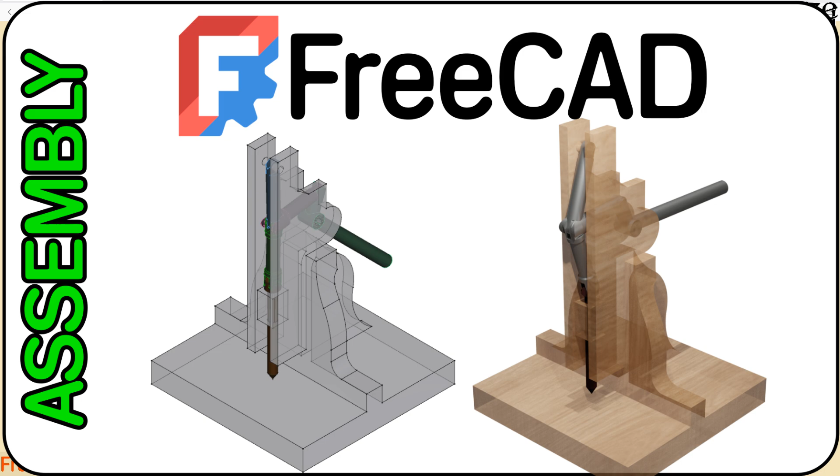Today I'll be working on this mechanical movement number 140, which is a kind of bias press. I think that's what it says. The toggle joint arranged for a punching machine. And this website also has this animation here. So this is how it works. There is a lever, you push it downward, it will push down this end.

And I think this would be a great tool to build on FreeCAD. So today I will be building this model in FreeCAD release candidate 2 of version 1. Let's go ahead and start working on it. First thing first, I want to import this image into here. And I think it's the downloads and right there.

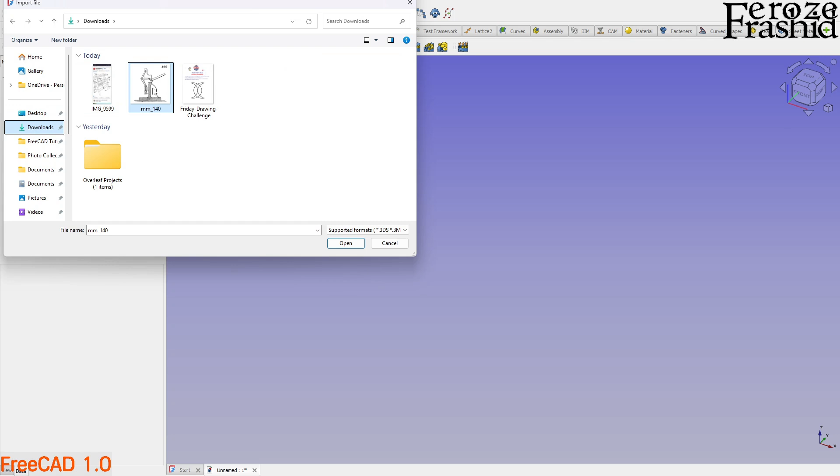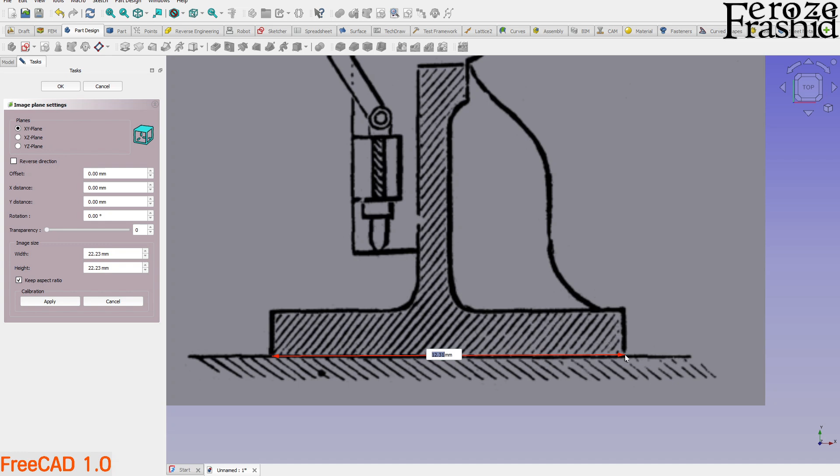All right. And I want to calibrate this image, so there is no measurement in here, so we'll just go by our eyeballing guessing. And let's say the base is about 6 inches wide, so that is, I'm gonna say 150 millimeter. All right, and that will give us some idea what other dimensions will be.

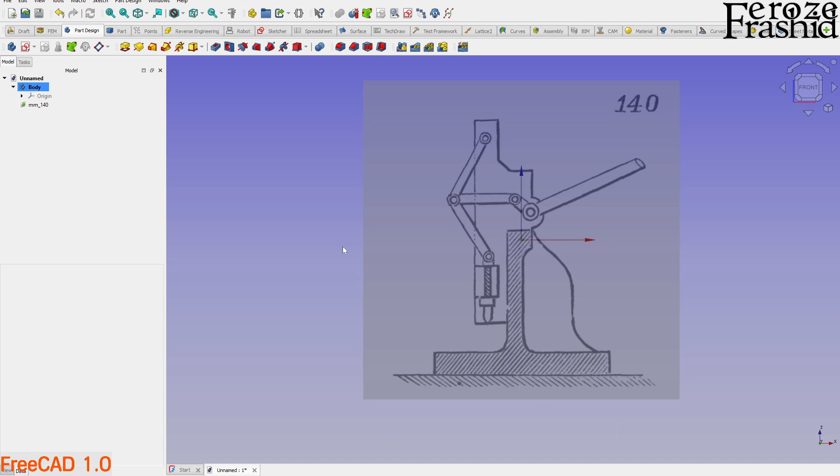Let's make it half transparent, and I want to place it on the front, which is the XZ plane right there. And then let's bring in axis cross by pressing AC on the keyboard, and I want to relocate the image to a suitable location. I'm gonna go ahead and say halfway. Not that it matters too much, but I think halfway is good right there. So that's all about image processing.

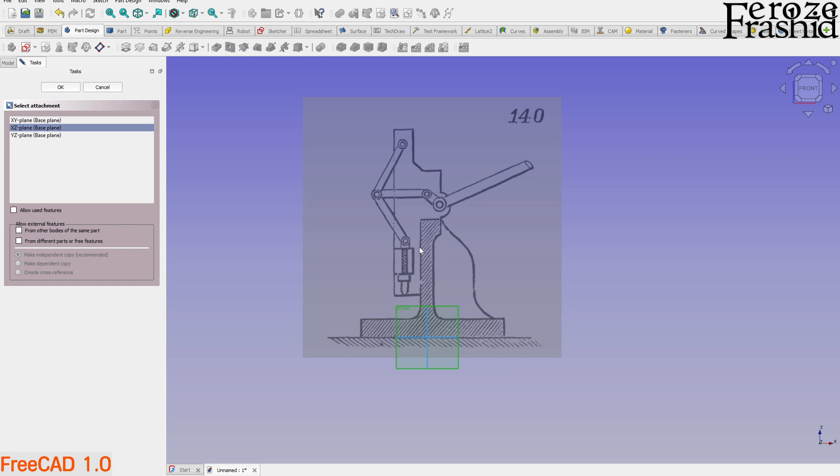And now I want to build one master sketch on this whole thing, and then we'll be reusing that sketch multiple times throughout this process. And exactly that's why we are building this model in Part Design. So with that, our first job is to build a sketch on XZ plane, and I'll use the polyline tool and do the outline real quick. All right, so I took a minute and drew this outline.

And if you are first time knowing about this new Part Design feature, up until the previous version, we could have only one area. For example, if we wanted to draw something in sketch, it would have to be a closed wire. It could not be like that. So it could only be one area. For example, here there are two separable areas.

So up until the previous version, FreeCAD could only handle one area, but in Part Design, the new version, it can have multiple areas in there, and then we can reuse that sketch multiple times. And that's why I built this whole thing, and it will be this master sketch. And here you will see that I have these multiple areas divided in there. For example, this line is broken into two because I want to use these two lines separately at separate steps.

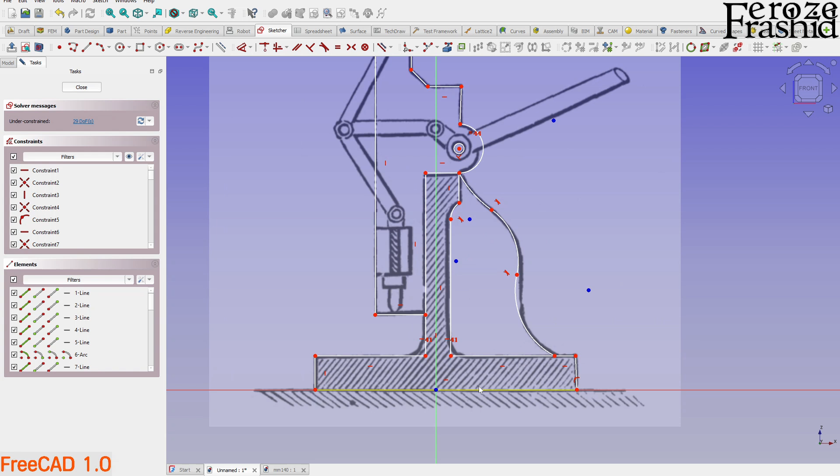And I did all the ballparking, so let me take another minute to actually go through and add some dimensions in here.

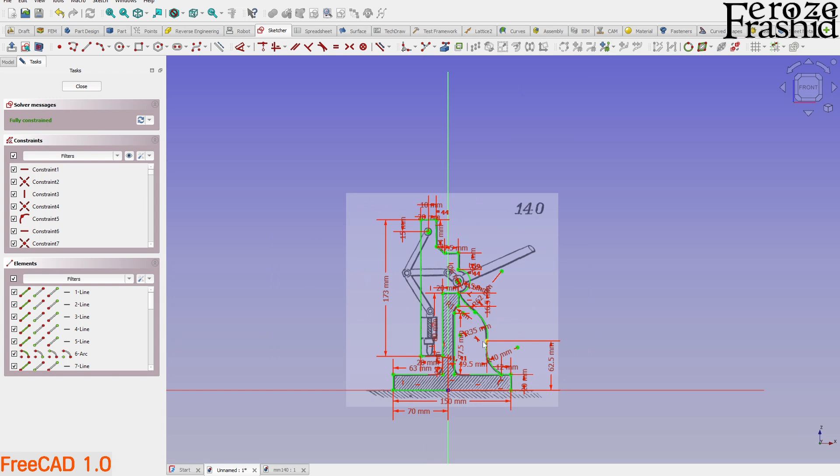All right, my friends, I have this sketch fully constrained, and I'll also upload this model. So if you wanted to download it and play around with this sketch, you can have that. So don't worry too much about these dimensions, but also know that these are ballpark dimensions.

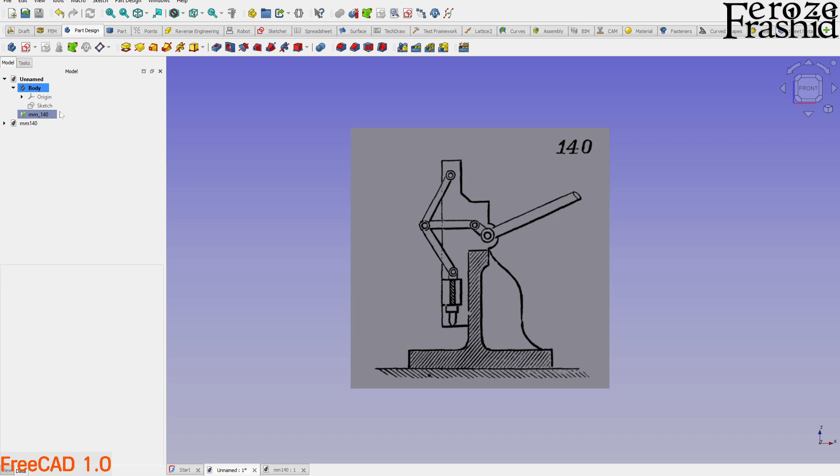So if we close that sketch, this is how it looks. As I said, it has multiple areas for us to extrude in Part Design. So let's take a look at this image one more time and see what we want to extrude first. This one looks like it's cut into cross section, and these two parts are solid ones. So what I'm guessing, this will be the base. So let's go ahead and take care of that first.

Now here is one thing that bothers me a little. If you want to use this inner side for padding, you would have to go around and select each small line. I wish there was an easier way. This is a big improvement, but if anybody is listening, maybe we can double click on this space, and that would just take all the lines bounding that space and select all the bounding edges. That would be nice, wouldn't it?

So until that comes, let's go ahead and select all the lines by keeping the control key on the keyboard pressed and using the left mouse key. And now that we have all the outer lines, I can go ahead and pad it up, right?

And I can pad it, say I want to say this is 150 millimeter, right? And I want to make it symmetric to the plane. So this is how it looks like. Later on, I actually want to trim this part just a little bit, so we will worry about that later. And also we'll have to make a fillet at this corner and this corner, so we will do that later.

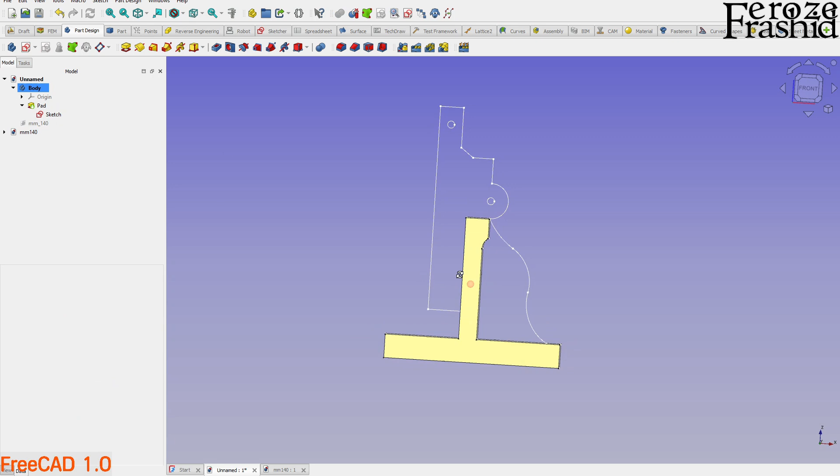But for now, let's go back to the sketch, make that visible. And so we have that base part. Now we'll have to work on this. So let's hide this pad for a minute and start selecting edges. So you will notice, because I'll be using this part individually, I broke this line in two right at this point. Otherwise this line would not be selectable up until that point. So you'll have to keep that in mind when you are sketching.

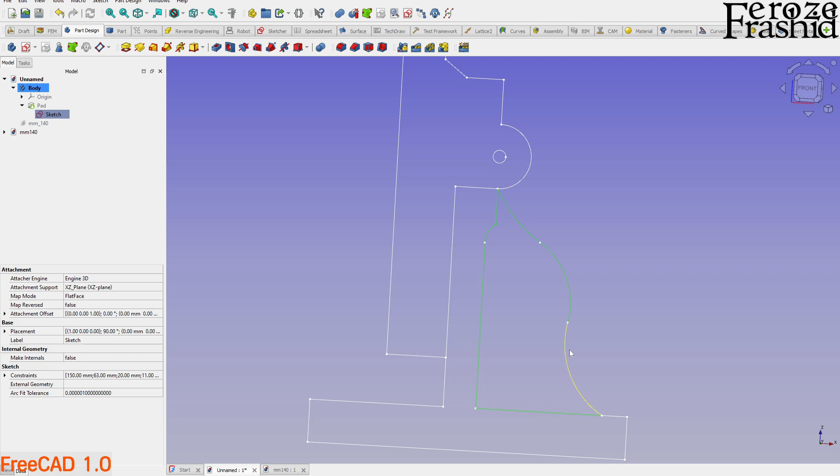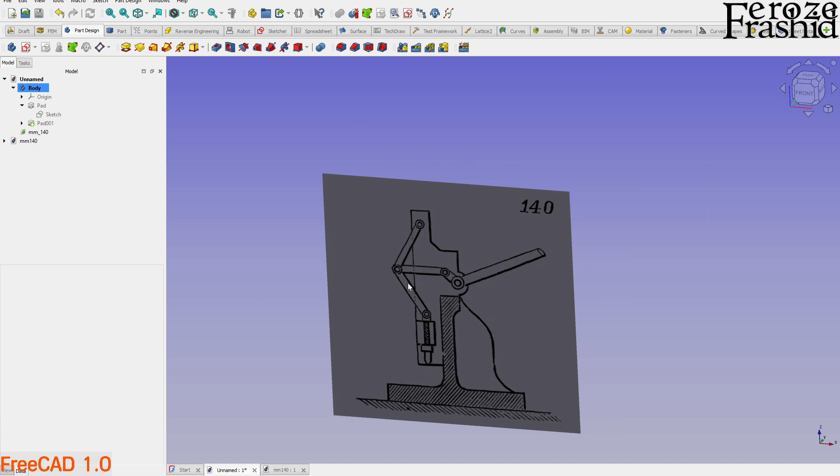All right, let's pad that up for now, say about 10 millimeters, sounds good. And make that reverse symmetric, that way it's at the center. So far we have this part and this part. Now on this one, we'll worry about these bars later, but this supporting side, I'm thinking that will be two sides, like there will be a gap in the middle for these to play around.

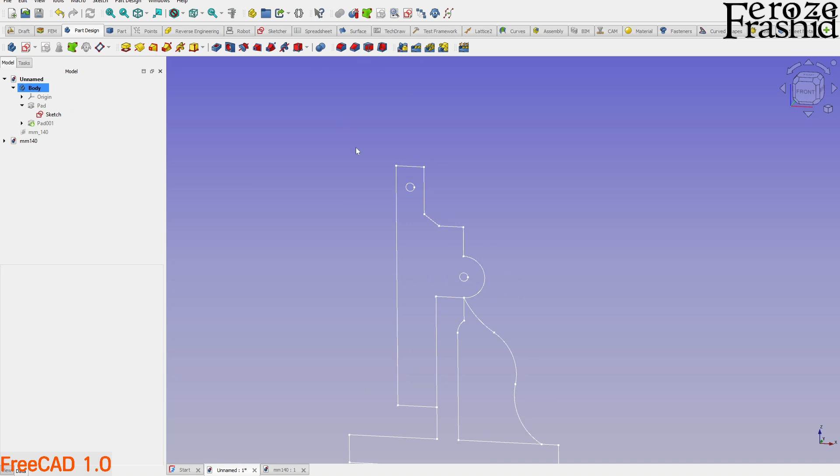With that, what I want to do, bring the sketch back and select the edges. I don't want to select these holes right now. So I want to go ahead and select this outside area. Yes, and then I want to pad it, right? So if I pad it one way, that comes this way, I want to make a gap in there. So I tried out this trick. Let's see how you like that. Select two dimensions in here. So if you select two dimensions, this 10 millimeter brings in towards me. This second length 10 millimeter brings away from me.

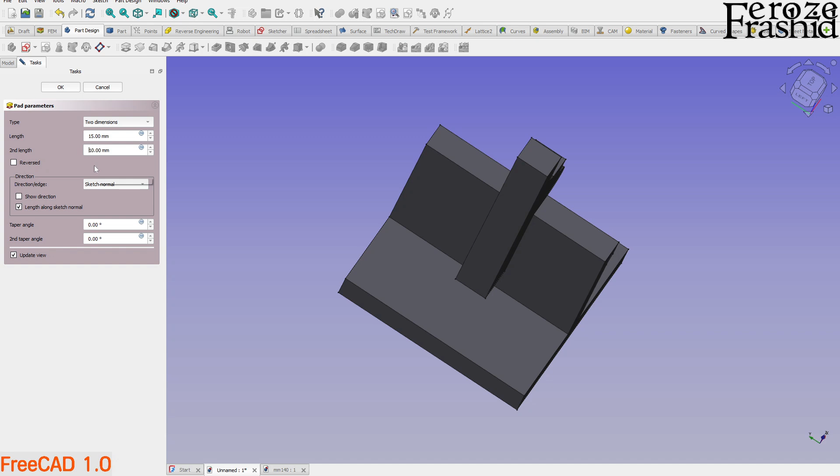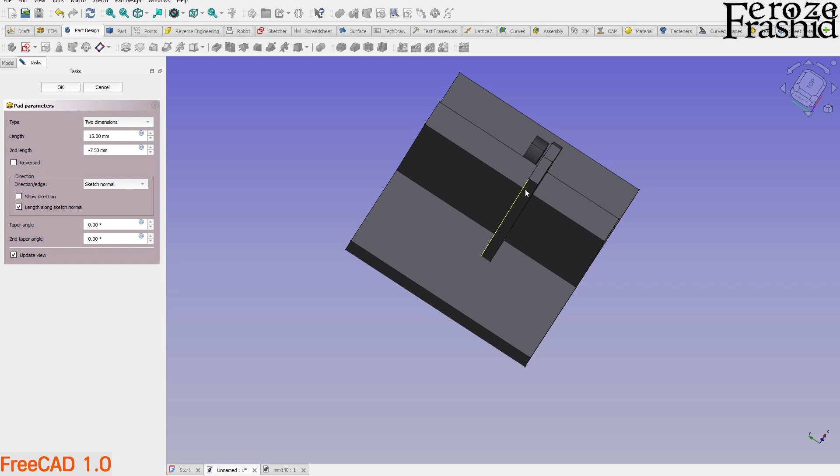So what if I made, say, this one 15, so that pushes toward me 5 more millimeter, and then I just made this one minus 10. How does that sound? Sounds great. So that's one way to actually offset it from here. I know there are other ways, but this could be done too. So I'm gonna make this one minus 7.5 millimeter. So the middle gap is 15 millimeter when I just double it up, right? I think that makes it easy.

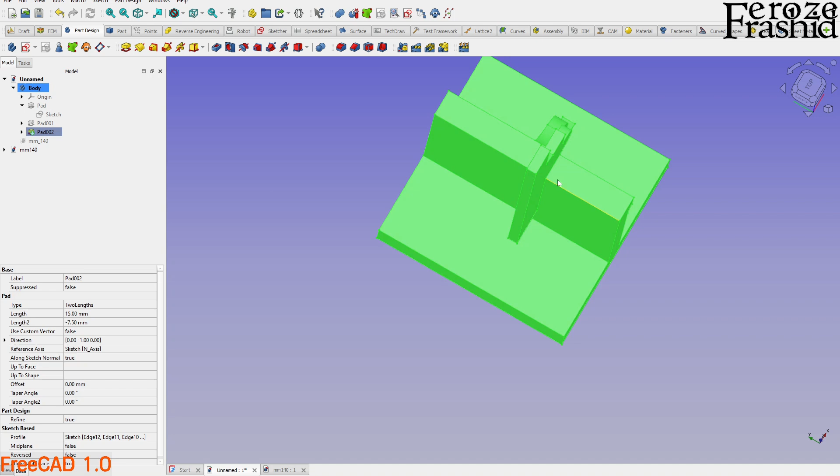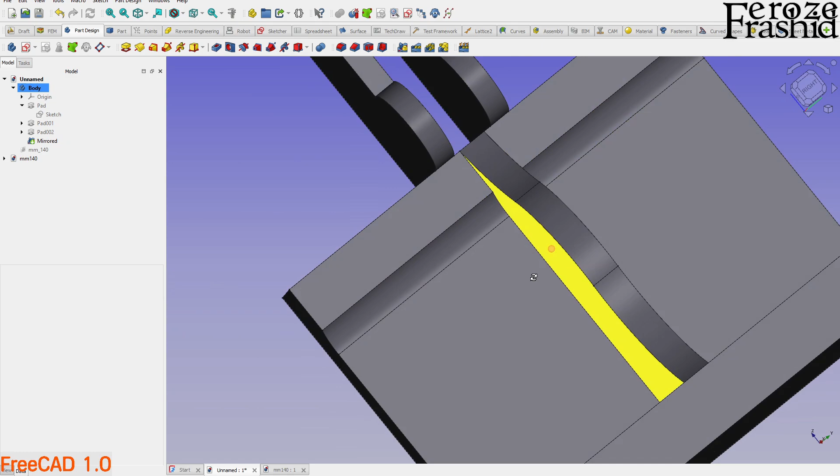Pretty cool. Now what I want to do, I want to take only this pad. Although when I select this pad, this whole thing selects. If you are proficient on the Part Design workbench, you know that when we are doing mirroring, this pad will only affect this little part. So I select that and mirror it over on this side, and that is going to be the XZ plane there, just like that. All right, so we just got our room for those bars to play around. All right, we built the main frame.

Now what I want to do, I want to make a pocket here, and I can go ahead and make a pocket, say through all. Pretty good. Now I can go ahead and take the pocket and mirror it again on the other side. So XZ plane, and then make sure transform tool shapes is selected. If it is transform body, for some reason it doesn't do it. So transform tool shapes, that's the new thing on this new version. Now it looks like the picture. So there is this spine, there is this main body, and here are the holding pieces. All right, we are going somewhere.

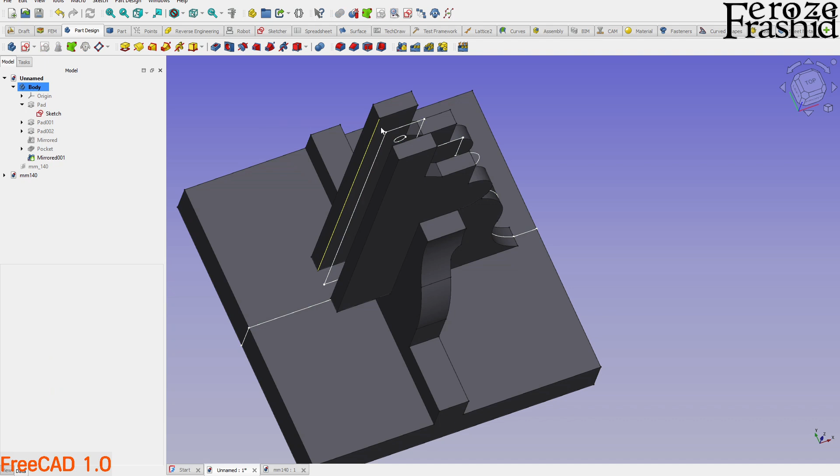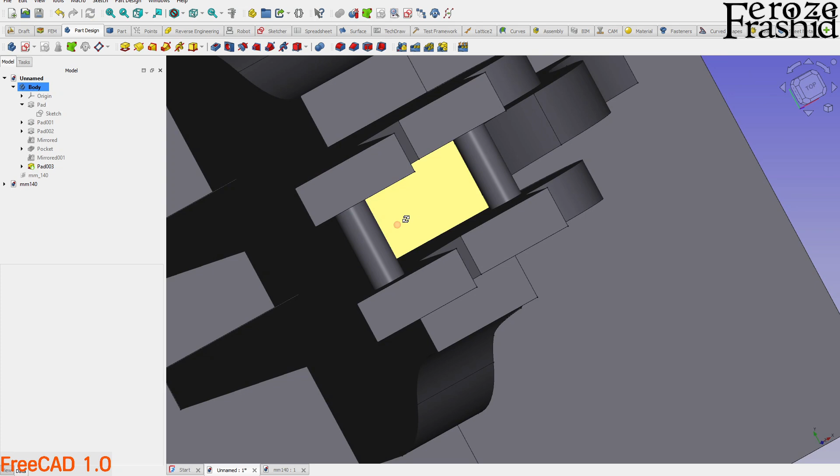Now quickly, I'm going to go ahead and bring the sketch back and use these two holes right there. So these two holes, and then extrude that, make a pad out of it. 10 millimeter will not do it, maybe 20, and make it symmetric to the plane. Make sure this touches both surfaces, and so that is pretty good. All right.

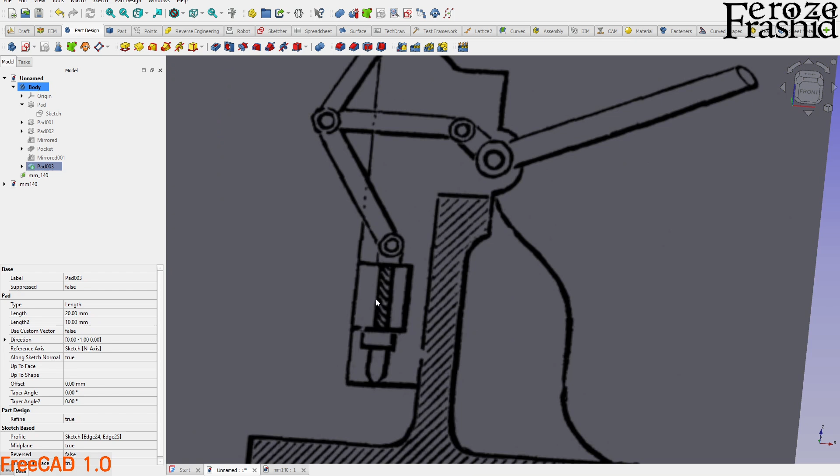Now let's take a look at this image one more time, like this. Now we'll have to work on this. Maybe we'll do this one too. So there is this area where the plunger will go back and forth, and that's integrated to the base, so we'll have to work on that one too. And that one we will just work off of our guess. So what I'm going to do is take this point, this measurement. So select this point. This is at 43 millimeter in the Z direction.

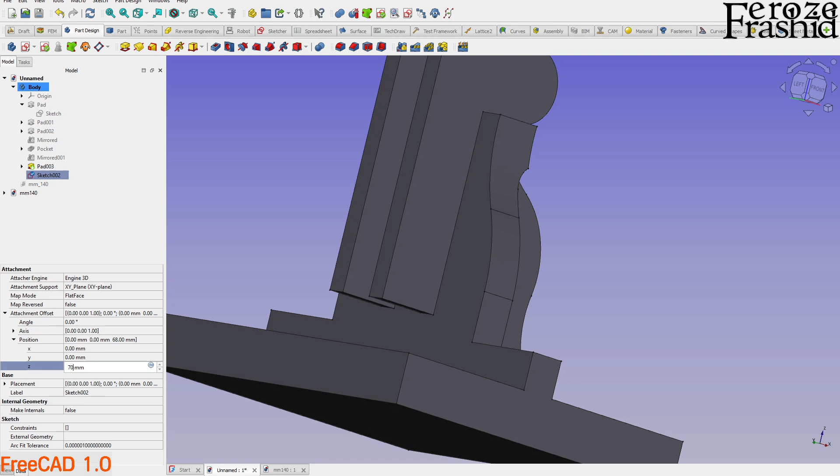So what I want to do, I want to draw a sketch on the XY plane for now, right? And then close it up, and then on that, let's go to the position on Z. I want to say 43 plus, let's pull that up by 25 more millimeters. All right, 68, maybe make that 70, right? And then what it does is it brings the sketch up right around here, and that's what we wanted to do.

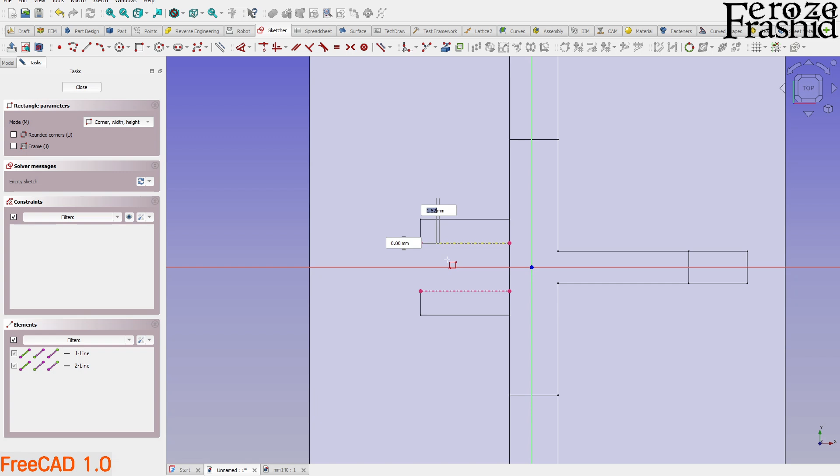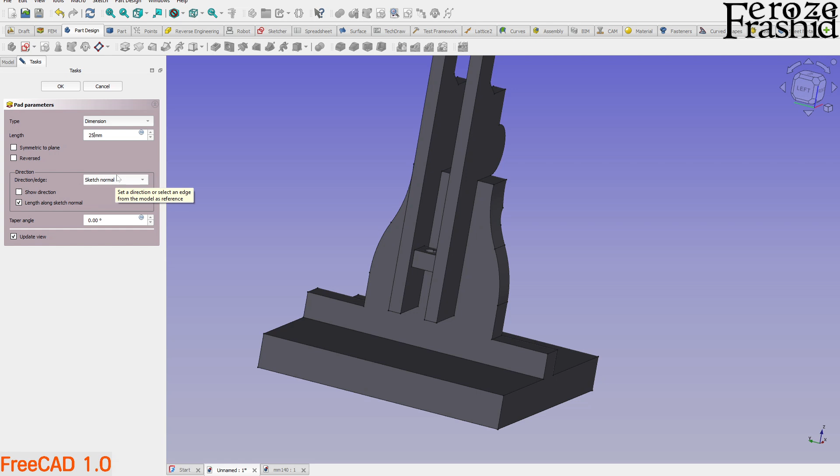Yes. And now on there, turn on the section cross, and then I took these two, and now there will be a rectangle outside and a center circle inside. So we have that sketch. Now maybe rename that sketch, say sketch plunger holder, and then pad it up for 25 millimeter. Sounds good. And there.

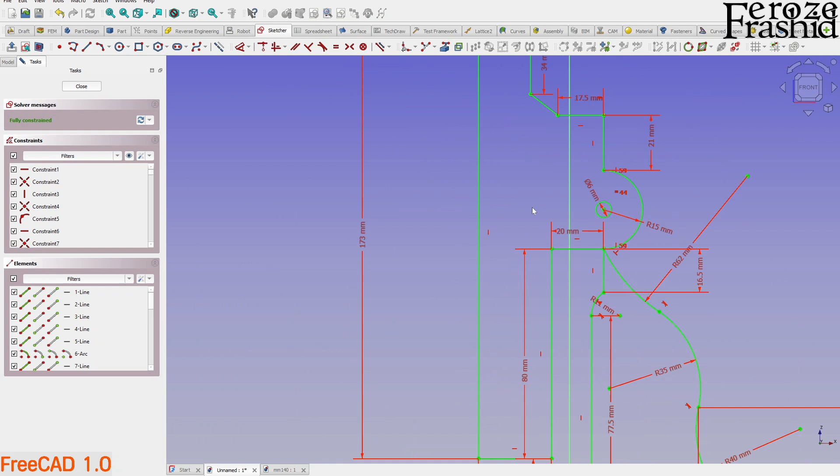Now on this one though, I think we'll have to go back. See how these two are not aligning? I would like them to be aligned. So let's go back to this and see this point is 10 millimeter from this side, which I want to use in here.

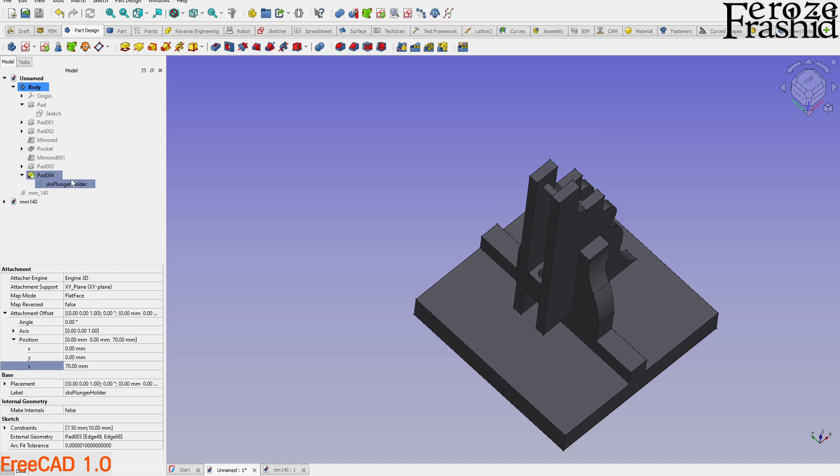So delete that, right? And then take these 2 points and say this should be 10 millimeter. So that way this will be another holder, and these two are concentric at the same center, not eccentric, and that's what we need. All right, so this is our first object, and say this is the base. Works pretty good. And now I'm going to rename that, say base body.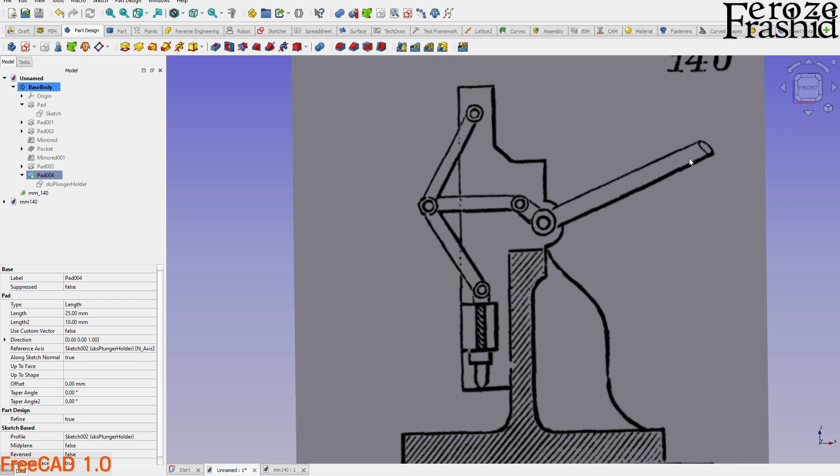All right, let's take another look at this drawing. And now we'll have to work on this plunger, this handle, and then 1, 2, 3 more bars, and this connection would be crazy. All right, so we'll have to make 1, 2, 3, 4, 5 small pieces connected in there. So let me take a minute and make these smaller pieces.

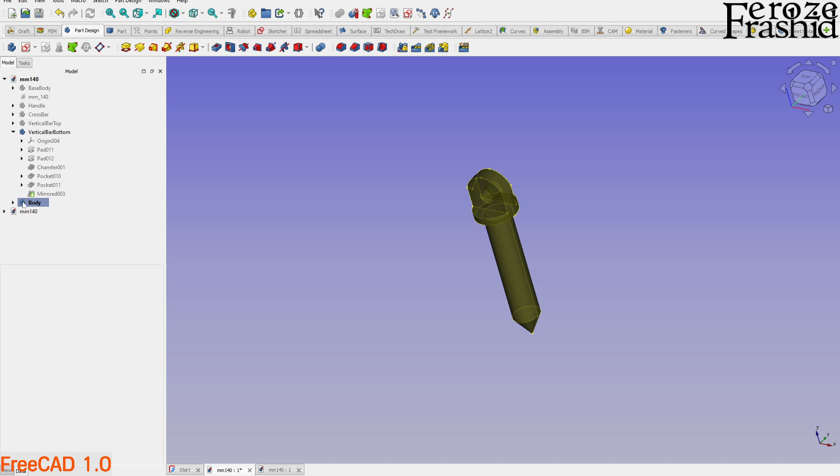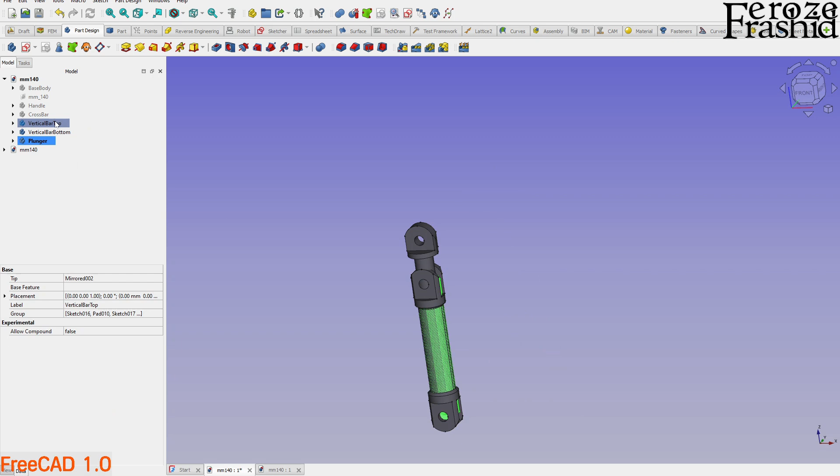All right, my friends, so I built all the parts. Let's take a look. This one is the plunger, right? And then we have this vertical bar, right? Where is that? There it is. And then we have another bar, all stuck there. There is the crossbar, there is the handle, and here is the base body.

Now note that these bars, the length may need to be updated, so we will work on that when we actually work in the assembly workbench. All right, so all the parts are modeled. Now it's time to put them together. We will be working on this new assembly workbench, which is new to FreeCAD 1 version. So if you are working on FreeCAD 0.21 version, I'd recommend go ahead and install FreeCAD 1 version from the website and give it a try.

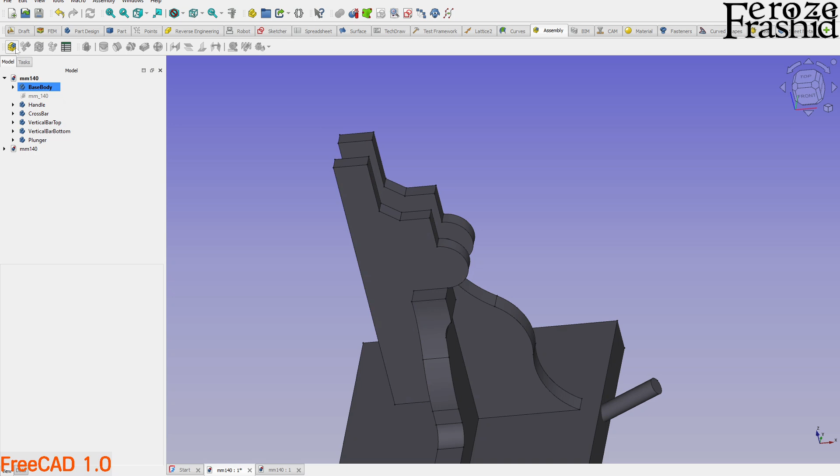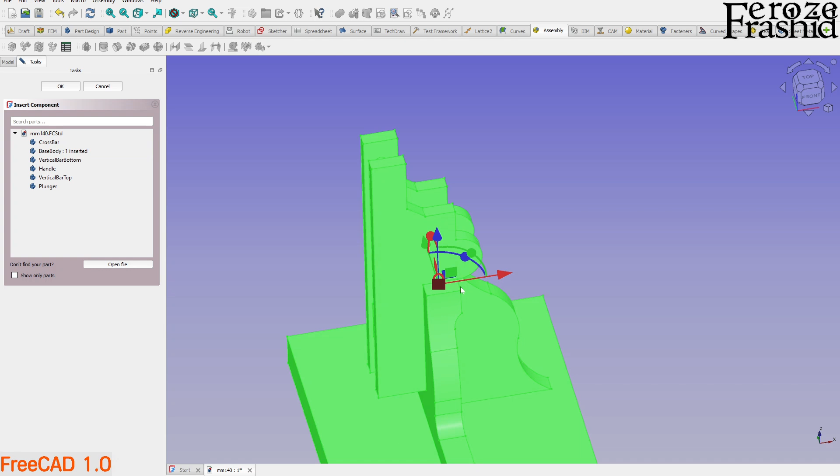So first of all, we want to add an assembly, and then I want to go ahead and hide all of these parts, so that way it's not getting confused. And then I want to add my first thing. So base body was my first thing. The first part will be grounded, say fixed in there. If you don't have it, go ahead and click yes. There will be a notification in here.

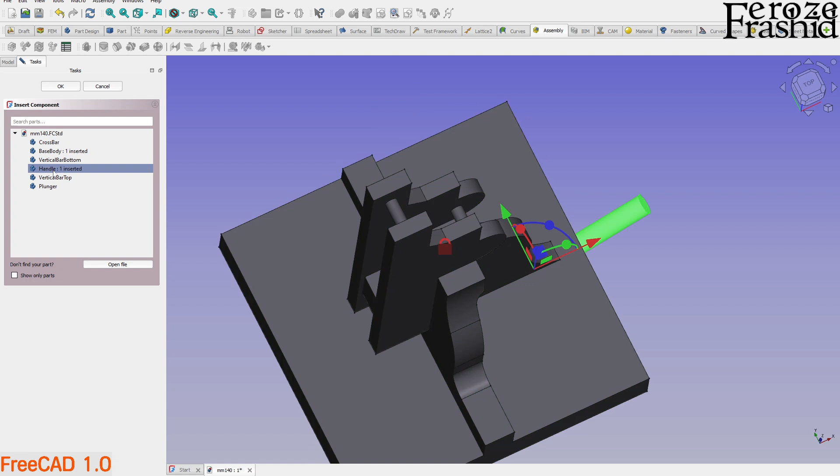And then I want to add the handle there. So in the assembly workbench, you can actually drag this part and move it anywhere. Click on that, and then it's pretty easy. What I want to do, I want to go ahead and select this. Look at the axis cross. So the z-axis is facing horizontally, and that's what we need.

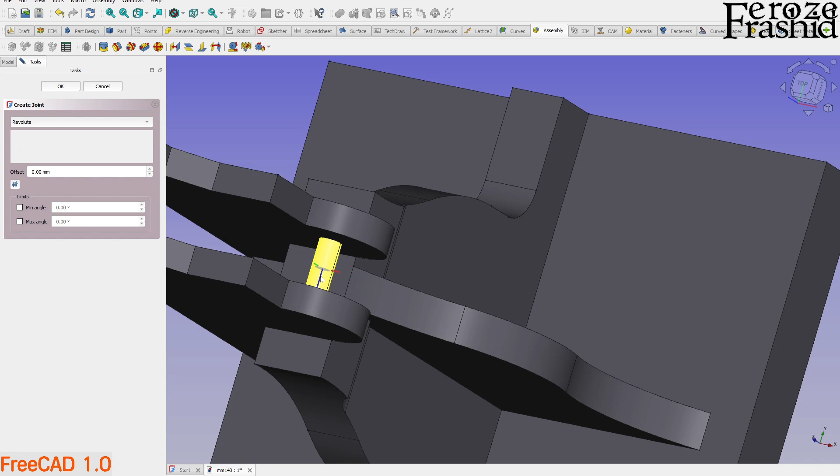And then you can select at the end, in the middle, or on this end too. So we are selecting the middle, and then we will do the same thing on this inside one. So try to make that in the middle part, so that way they will be matched together on that middle part. But if you cannot do that, there is this offset portion that you can move it up and down. So we have that 15 millimeter gap, pretty tight fit. In reality, there will probably be just a hair of clearance, but let's not worry about that.

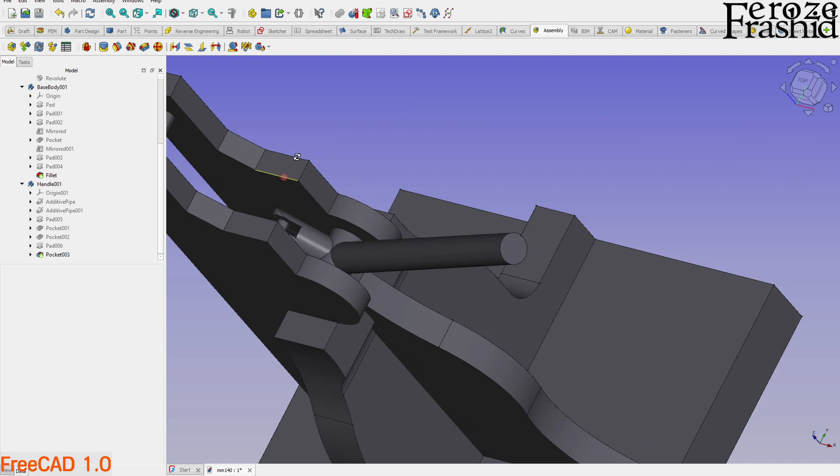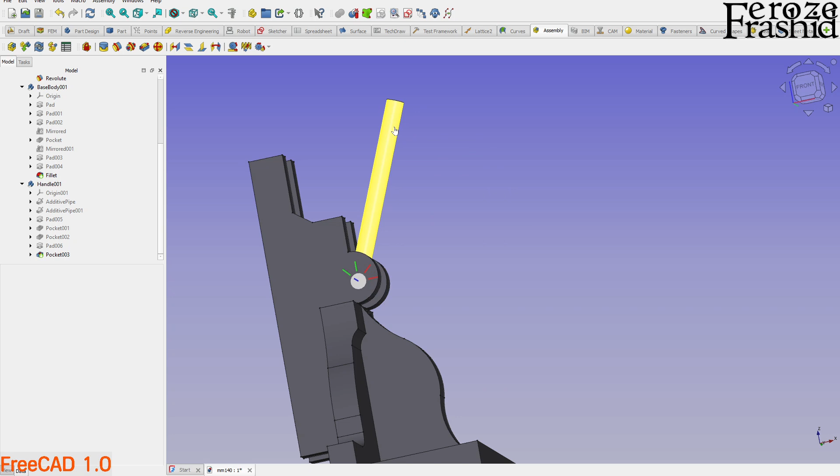So that is the cylindrical joint, that's the revolute joint, and this one is now moving up and down pretty good. So look at that. So this is a very good wide range. And then if you keep coming, it's going inside, which is impractical. So what I want to do, I want to limit it from here to maybe up to here, right? And so we can do that.

What we can do is get into assembly and see there is this joint under there. There is this revolute that we just added. Now this one, let's give it a try. We want to rename that as handle revolute, and previously it was not possible. So let's see.

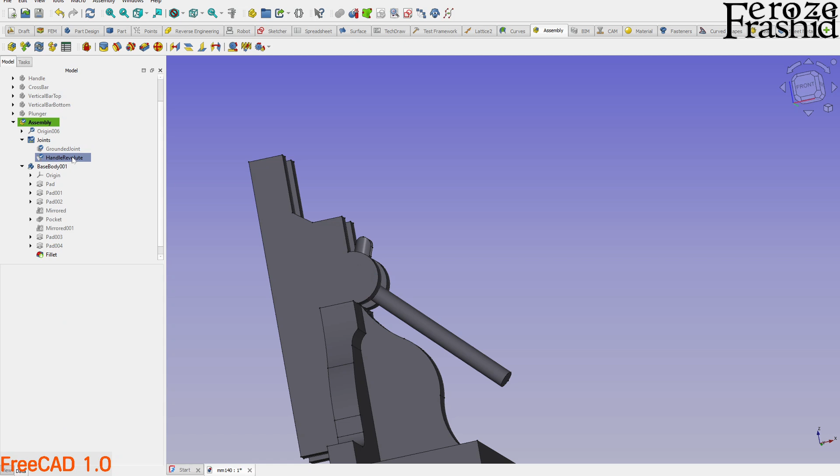Oh, now I can actually keep the name. So there it is. What I want to do is double click on it, and then you will see that there is this minimum angle and maximum angle. So keeping that, just move it here. So this is one of our limits, and it says -73 on both of those, and this is our other limit, which is +48. Say this is the maximum angle, so let's go to minimum and select that, right? And then let's go to maximum, select that, and that's how we set angles.

Now we can actually run it. Every now and then it takes a couple of trials on this. So if it doesn't work, just cancel it out and then try again. So this is now the limit. Pretty good. All right, the next part I want to add is, say, crossbar.

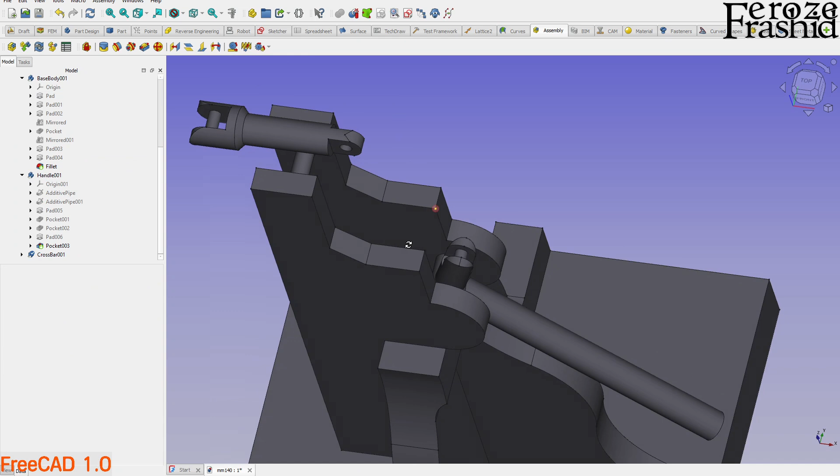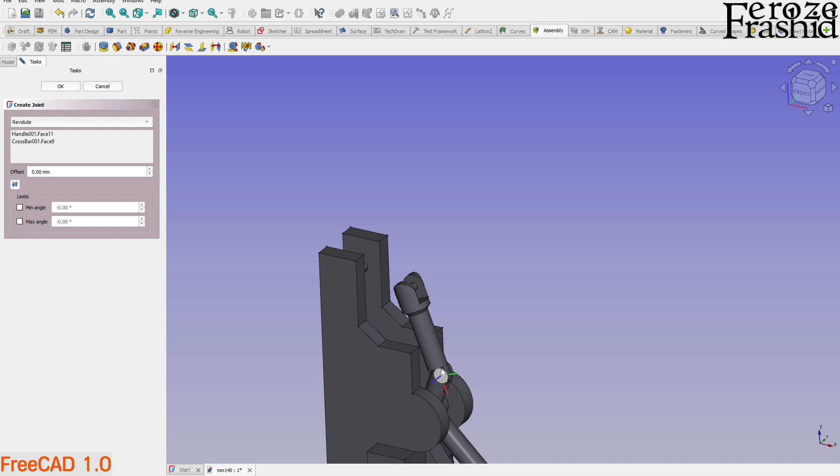This was the horizontal one, and now let's move it up somewhere here, and I want to add it with here. So it will also be a revolute joint, and this is a 4 millimeter gap. So select revolute, and I want to select this middle part and select this one. These are pretty parallel, should be okay. But if it doesn't work, just bring those parts closer together, and then make those flat surfaces parallel to each other as much as you can. That way the software doesn't get confused.

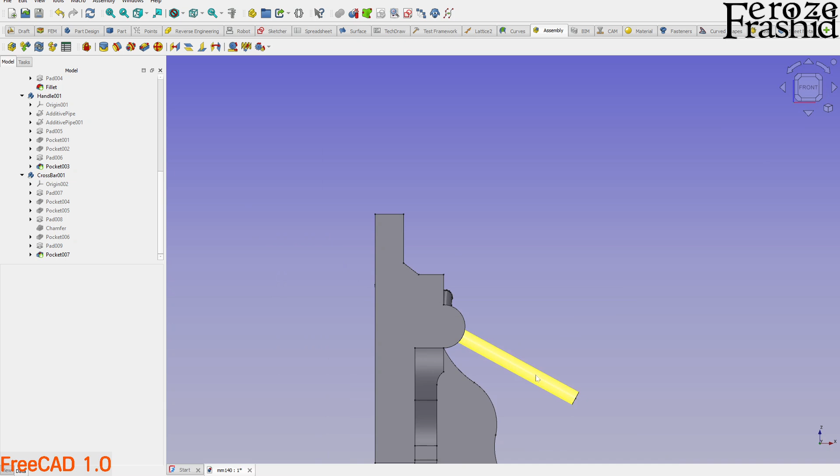Alright, so on this one though, I don't want to worry about this angle movement because this is the only part that will be driving things. I don't want to worry too much about it. Now looking at things, let me see. Go to view, and I'm gonna say clipping plane, and I want to do it Y. Yes, I want to keep it right there. So from here, I think I made this one just a couple millimeters longer than what we needed, or maybe not.

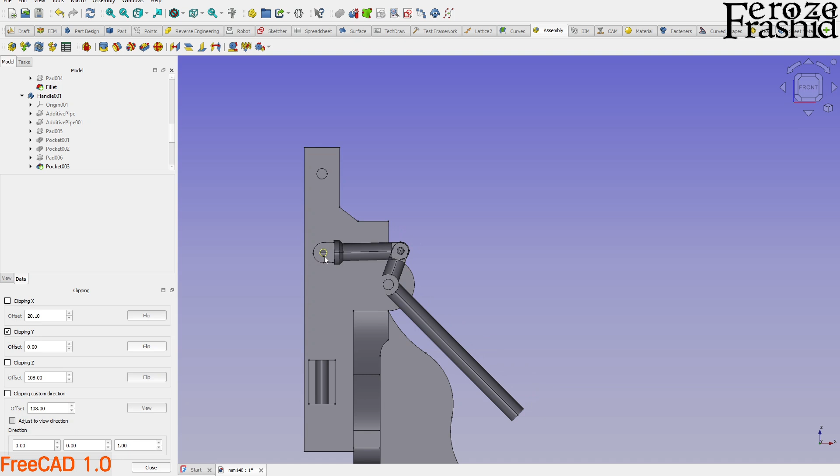So I want these two on the same vertical plane, or almost there. It doesn't have to be very close, but I see that here is a problem. The animation will still work, but we'll have to look at that one too. Interference problem. All right, and now if you'll notice, this is the 15 millimeter gap. On this one though, I fattened up the end one, because I'll have to fit in 3 parts in here. That's why this plunger is slim on the end, but this end is a little fat.

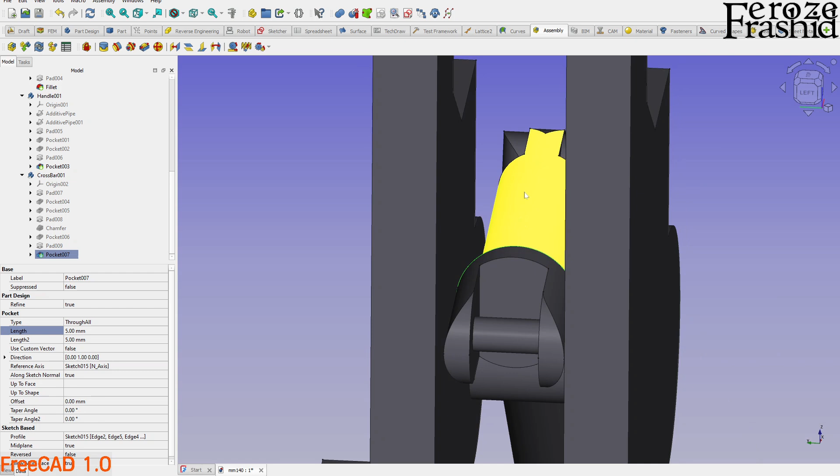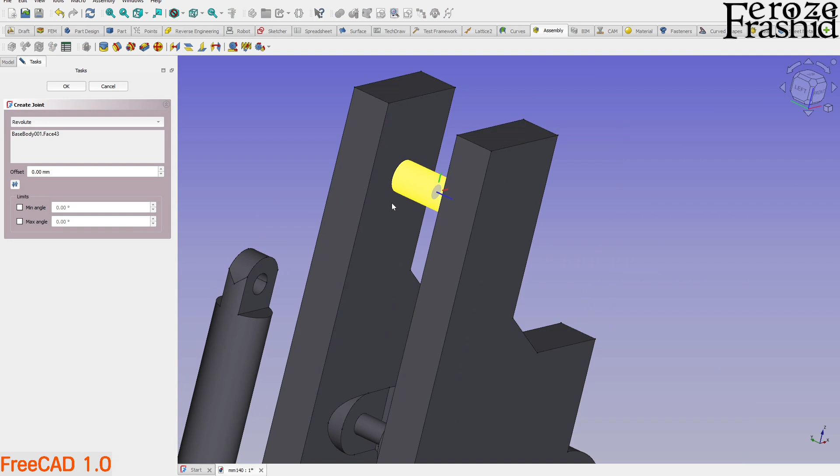Alright, let's keep adding. Vertical bar bottom, vertical bar top. That's the one I want to add, the top one. So this is 4 millimeter, and this is 4 millimeter too. So I'm gonna go ahead and add a revolute joint on the mid and on this one. Right. Practically I could actually make this 15 millimeter wide as well. That way it would not go back left and right. But since it is a revolute joint, it will not move anyway. If it was a cylindrical joint, from here it would go left and right.

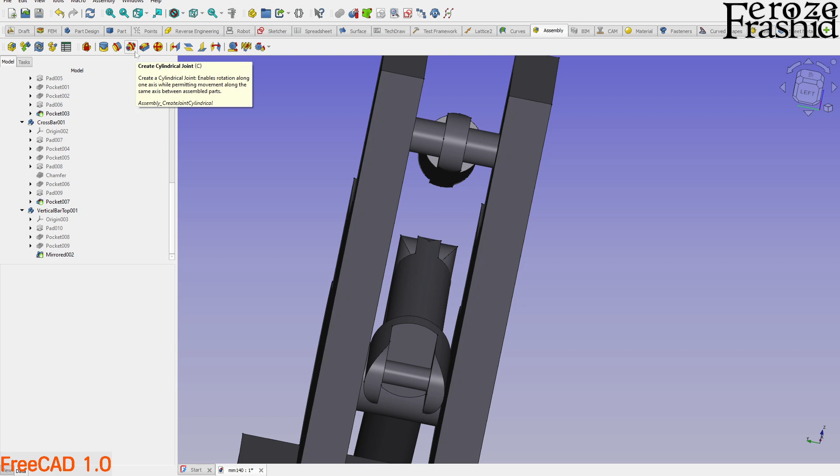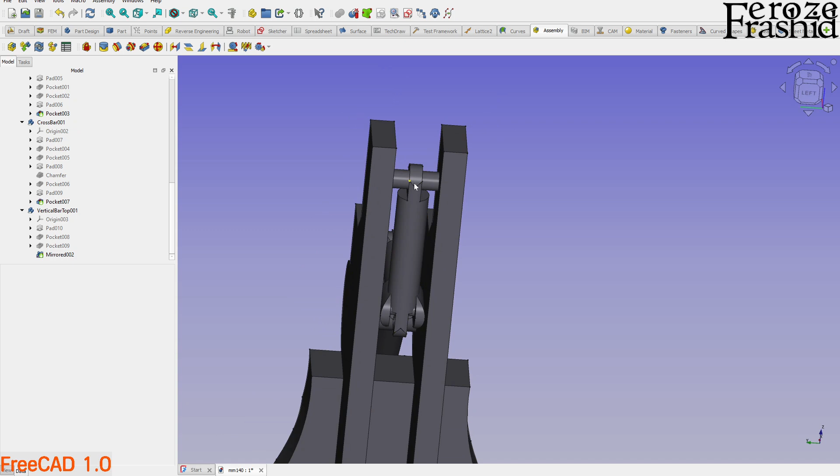I have everything set up on pretty vertical planes, pretty symmetric, so that way I can keep applying revolute joints. But if you are feeling a little nervous about it, one of them you could make cylindrical and another one revolute, and they will still act pretty good. Right, on this one, they have the common center, the common vertical axis. So I'm going to go ahead and apply a revolute joint. Take this middle one and take this middle one.

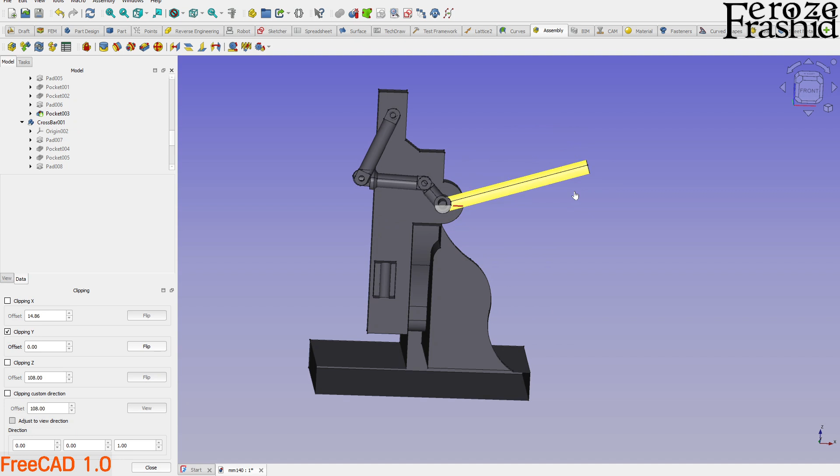All right, so now what it will do is, okay, view clipping plane on Y, and now we can see. So this is how it is moving. That's the maximum it will go, and that's the maximum it will come inside. These are the two limits. All right, I'm gonna go ahead and add vertical bar bottom. Let's see, can I work on this with the clipping plane? Yeah, I can, but I have to be careful. All right, on this one we'll have to be careful.

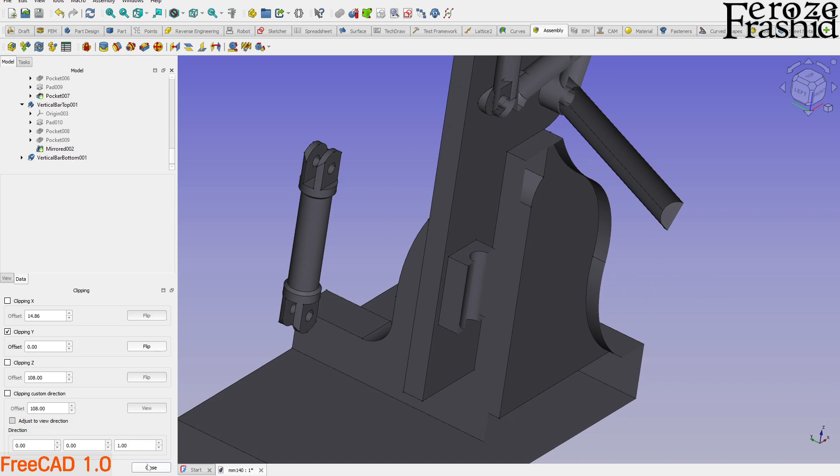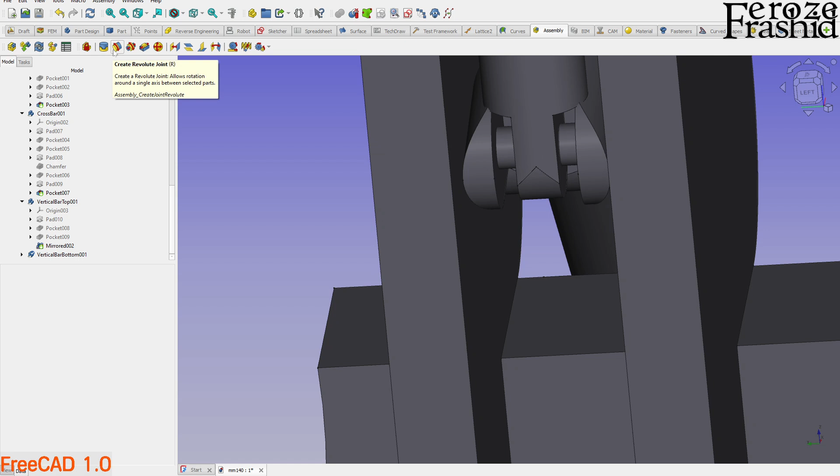So let's close this. Now on this I have 2 flanges going in there. The distance between these 2 ends is 8 millimeter, and the gap is 8 millimeter, so it will fit in perfectly. So it will be another cylinder revolute joint, and on here I want to take this edge, and I want to take this edge, so that way it's fitting in right there.

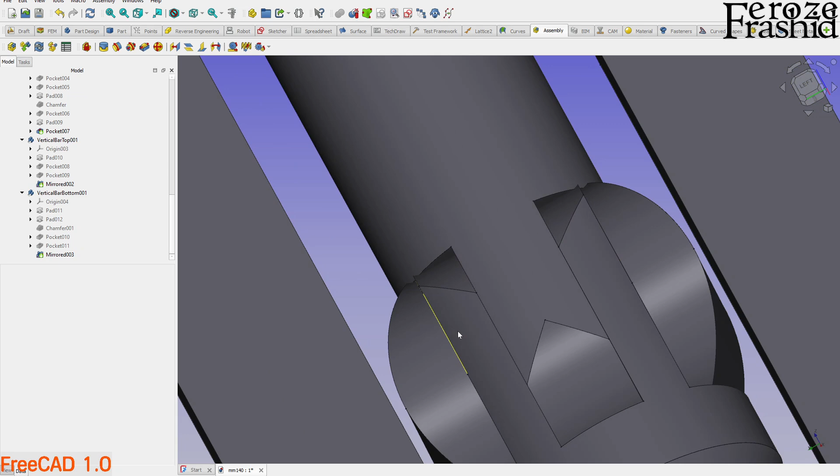Yeah, just like that. That's what I wanted. It's getting a little tight in here, so I guess this clearance is okay, but this one... Yeah. All right. So there it is.

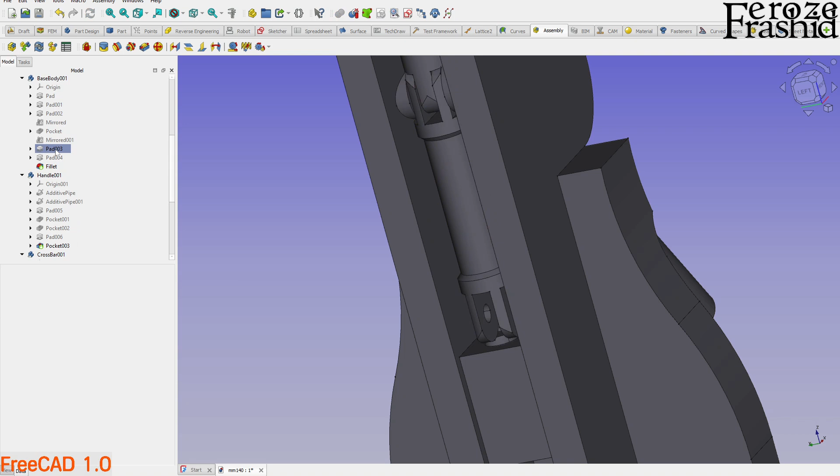Now I see right away that this is a little too tall. This vertical bar bottom, I can actually work on it. I can make that length 15 or 16 millimeter, and that will shorten it. So this is parametric, pretty parametric. I can update the parameters from here within the assembly, or I can go in there and then change those values as well. See how it plays around.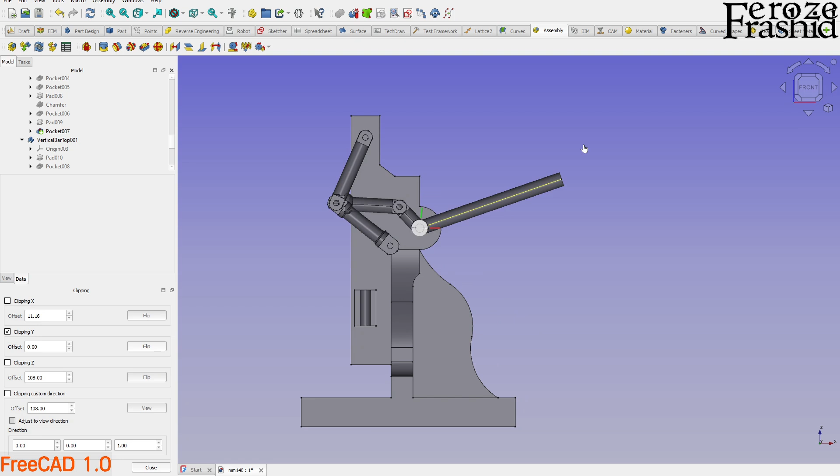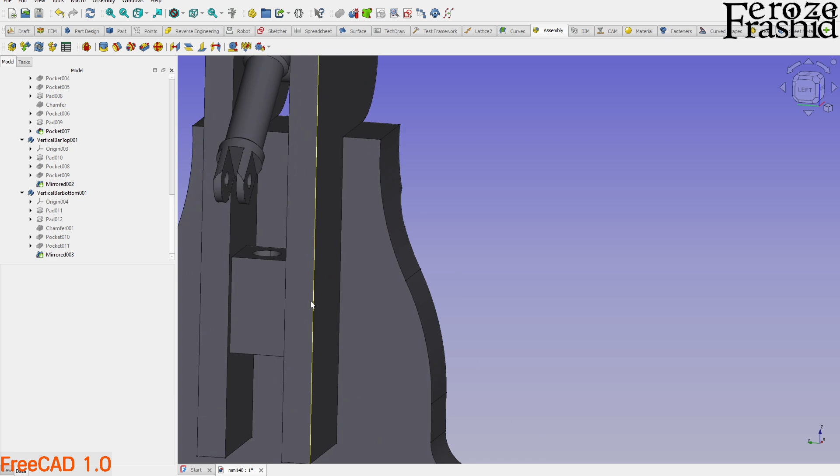Right? Oh, is that a gravity effect? It goes all the way, right? And then this one just looks like it was swinging just for a little bit. I would be really happy if they introduced the gravity effect. As I said in one of my previous videos, I'll be really excited if they had gravity effect included in this assembly workbench, and also a tendon or a rope effect. I could build a pulley that way if there was a tension member.

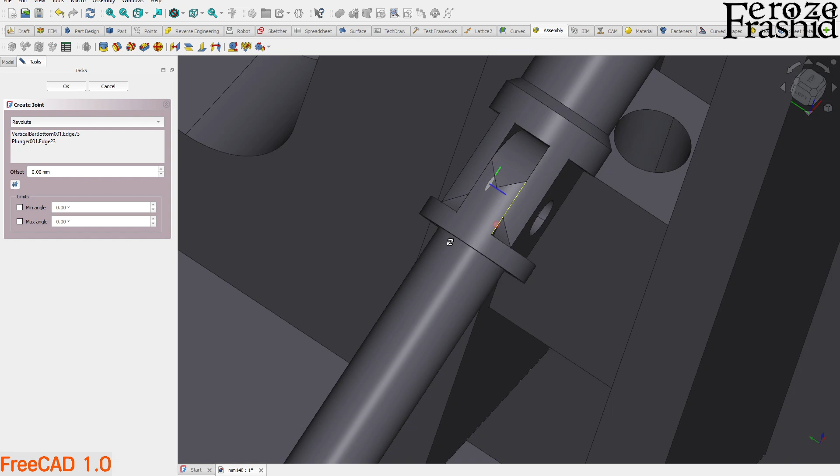All right, and now let's see. Plunger is the last thing we want to add. Now on plunger, this one will go in here. All right, so that's a 4 millimeter gap. So that's going to be a revolute joint. I want to take that inside, right? And then take this inside. So taking that circle, it kind of fits in perfect. But as I said, this edge is kind of messing things up. Let's pretend it's working fine. I don't want to go in there and mess things up right now. But this is kind of the way you should do a plunger kind of thing.

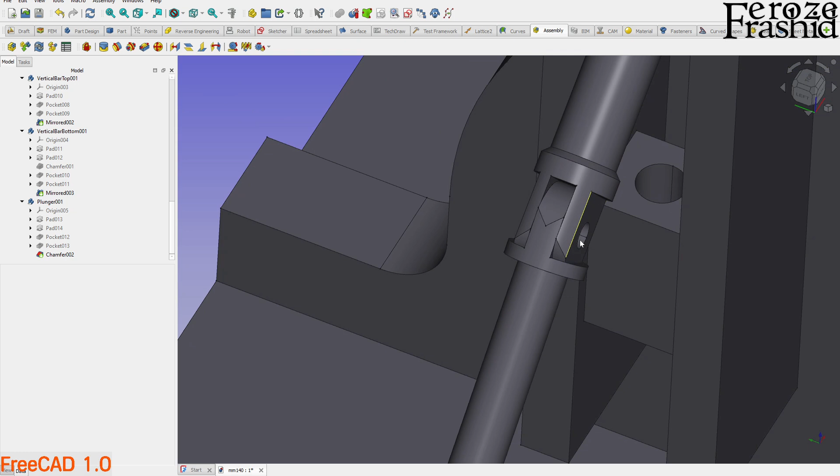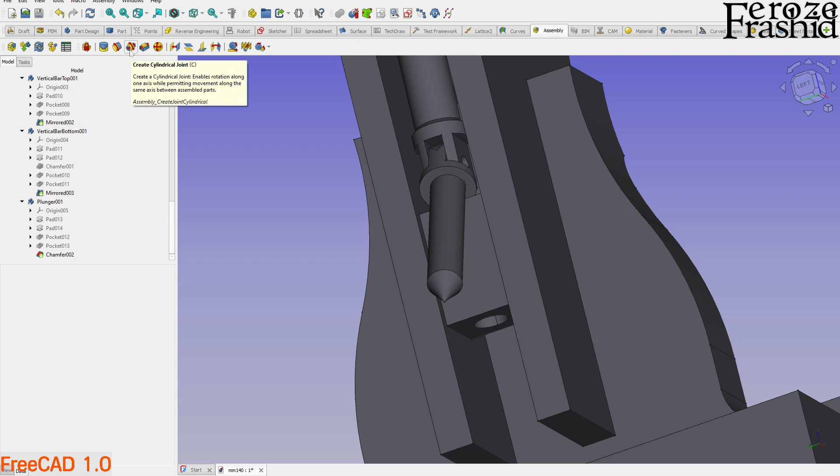I guess there should have been a rod in between, but again, I can apply the joint even if the rod is not there. And now I want to bring it down here. All right, so this is going to be a cylindrical joint, this one. So it will allow rotation and movement. So take this and take this there. All right, so let's take a look how it plays now.

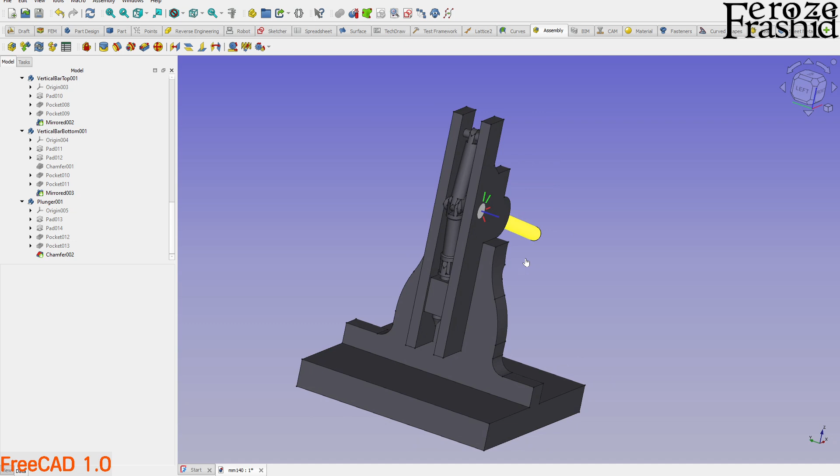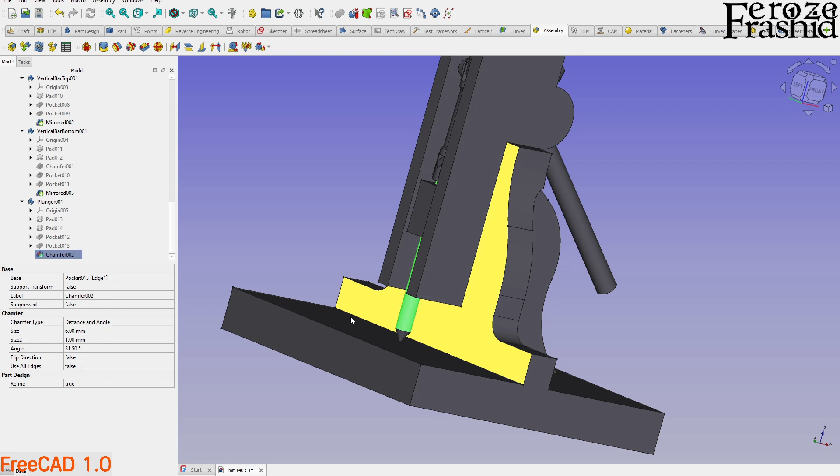Wow, it's working fine. So the plunger is getting inside, and if you take it all the way down, it will just punch it through. But you see the problem, this pin is not coming down enough, so we'll have to make it long. So I want to say this pad, make that 100. Yeah, no, that's too much. 90 maybe. So that's touching, right? So that's the maximum. Yeah, let's keep it there. So if we bring it up, that much amount of material you can put in there and make a punch. Yes, so now it's working fine. It's punching left and right.

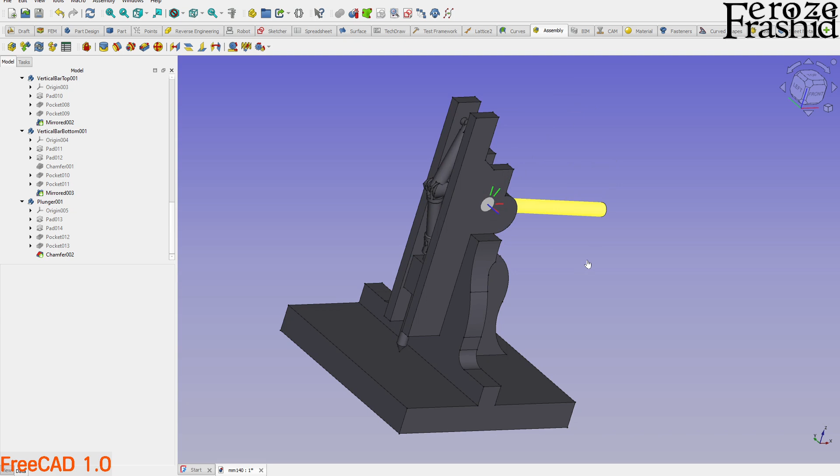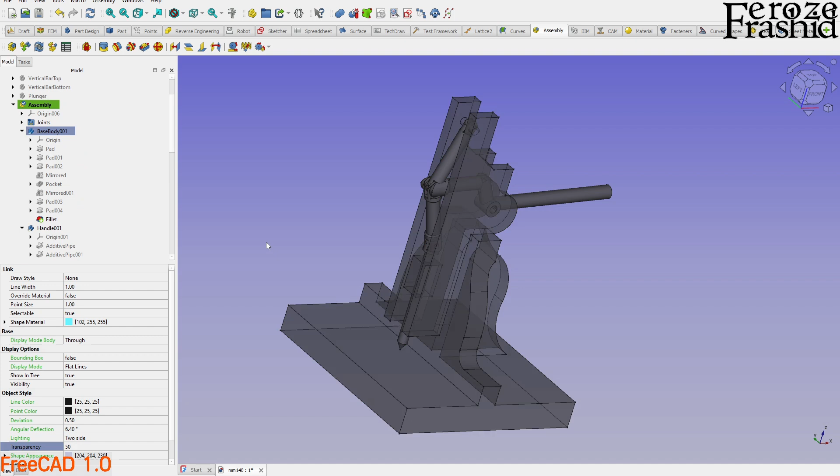Right, I want to see if I can make this fillet. Oh, transparency, where is the transparency? So there's the base body, and I can take the transparency to 50% and see if that helps looking at the movement of this. Awesome. So that is pretty good.

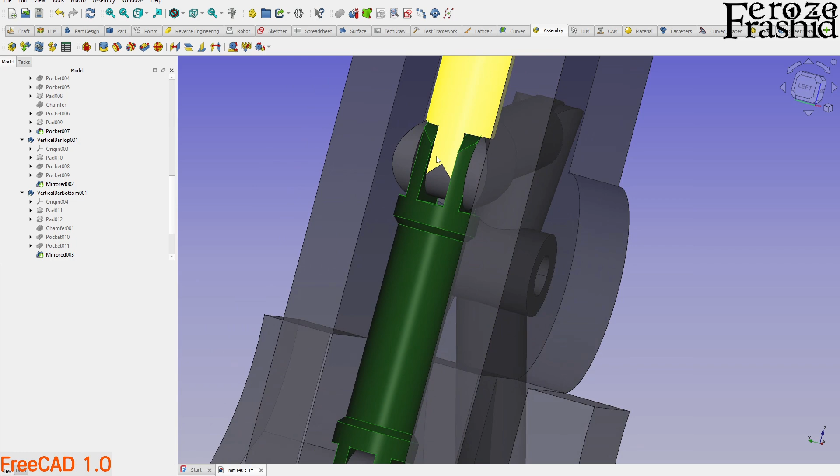If I did these models for the second time, I would probably clean this thing up, make these flanges the appropriate length where they will not be touching or getting into each other. But for now, I think this is a pretty good demonstration of how mechanical models work in assembly workbench. And on this assembly, we only used the one revolute joint, and that was very easy to do.